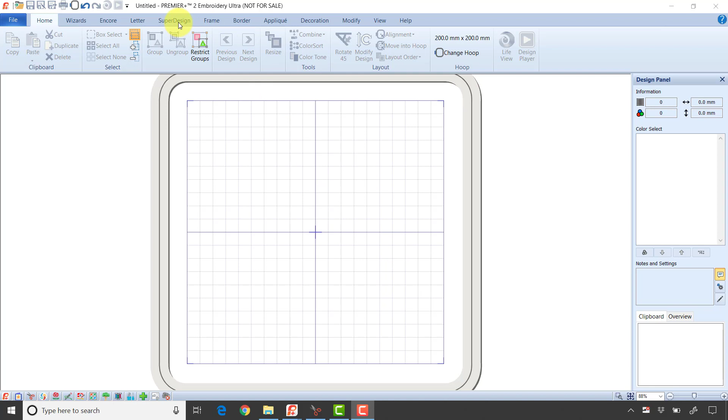The first thing I'm going to do is go over to the SuperDesign tab, change my category to flowers and leaves, and grab this second little red flower. The nice thing about the super designs is you can specify how large you want them to be. I'm going to bring this in at a height of 25 millimeters by setting the size to 25 and clicking the green check mark to apply. So I have that little red flower now.

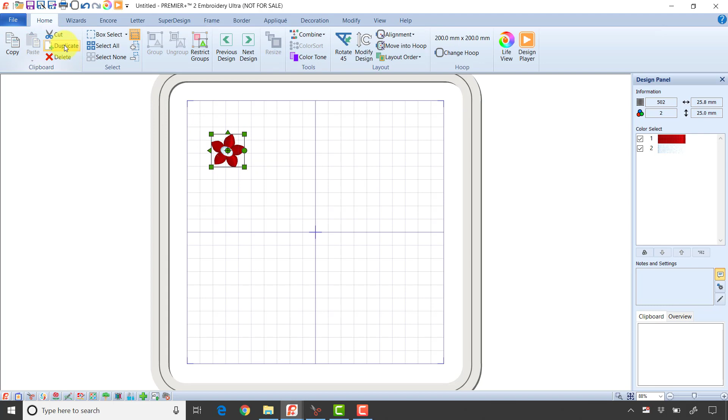I'm going to go to the Home tab, and I want a second flower, so I'm going to duplicate it. On this one, I'll go to my color list because I want this flower to be a different color so we can see the difference when we start encoring. Let's double click and make it a nice light purple. Well, that looks like dark orchid. That'll be good.

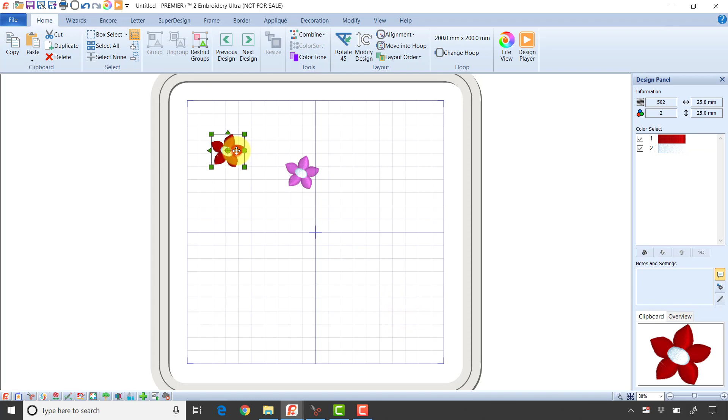So now I have two different designs. The first one I brought in was the red flower, and the second one, the one I duplicated, is this light purple one. Now let's go over to the Encore tab and talk a little about the Encore settings. I'm going to start by just encoring a single design, then we'll look at both of them.

So if I'm encoring this flower, first of all I'm going to start with the shape, a circle. When I encore to a circle, I have a design selected, and I tell it how many repeats I want. So if I want this to have 8 repeats, I just run the number of repeats up to 8 and click preview, and it puts 8 of them in a circle.

Now I can grab any of these designs and pull them in or out and adjust how they fall in relationship to one another. When I've created the design that I like, I just come over and click the Apply button, the green check mark, and that will create the design.

Notice up here under Arrangement, they're checked to be grouped. So they came in as one group, and I can tell they're grouped because I have these orange handles in the corners. The orange handles tell me I have multiple objects here, in this case 8 flowers, and they're separate objects still, but they're grouped together so I can move them or treat them as one.

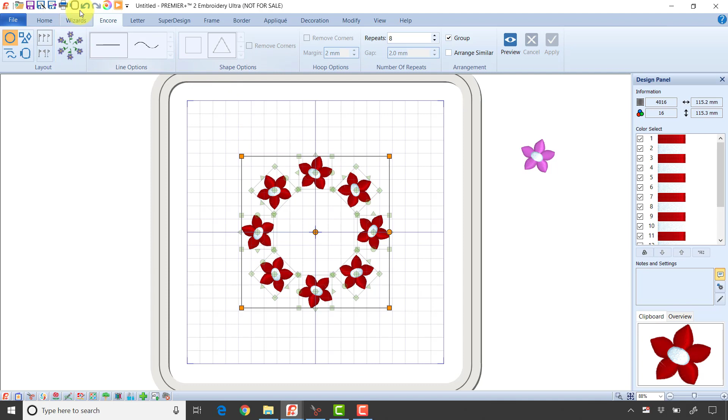I'm going to hit undo now, so I just have the single flower. Then on my keyboard, I'm going to hold down the Control key and press A. Control A is select all. I could also go over to the Home tab and click select all, but Control A is an easy way to select everything that's in my work area.

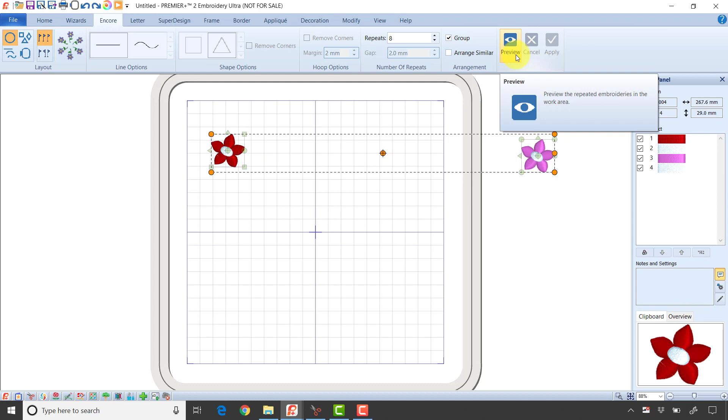Now if I come in and encore these 2 flowers, it will alternate every other flower. So I start with my first flower at 12 o'clock, and then it spaces out the rest of them evenly, alternating between number 1, number 2, number 1, number 2, and so on.

Let's cancel that. The next one I want to look at is encoring to a line. So if I encore a single design to a line, it will just space out copies of that design. Now remember, we also have the option to mirror. Right now I'm on standard, so all of the flowers are facing the same direction. If I go to mirror, then every other flower will be flipped. So if I click preview again, now you can notice that every other flower is mirrored.

Now one of the things I like about working with Encore is if you don't like the setting or you want to change it, you don't always have to cancel out. I can make a selection, click preview, and then come over here and change my options to look at it a different way. I am going to go ahead and click cancel now.

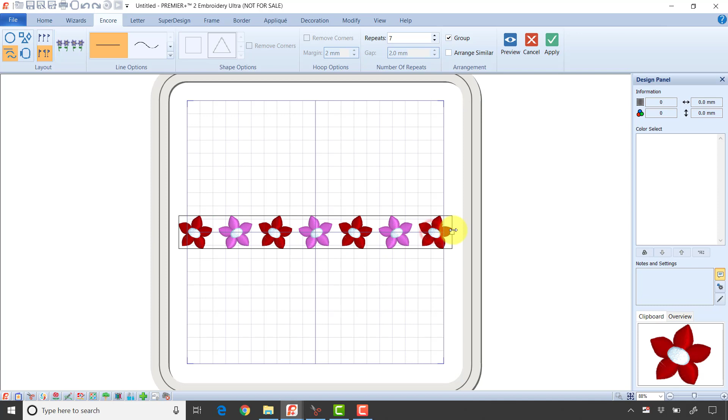Now I'm going to do my Control A again to select both flowers, and this time let's go to, say, 7 repeats. When I click preview, now I have design number 1, design number 2, design number 1, design number 2. I have a handle over on the right side, and if I click and drag, I can space those out evenly. If I don't want them to be mirrored, I can come back and change it to standard, click preview again, and it will redisplay that encore, now with all the flowers facing the same direction.

And again, I can space them out or adjust how they fall either closer or further apart. This is a great way if you're working with buttonholes in the hoop to get even buttonholes spread out for the back of a pillow or a garment. Let's go ahead and click cancel.

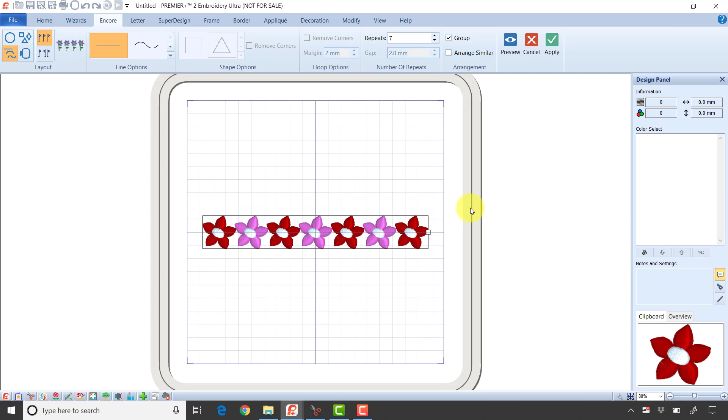I'm going to grab this flower again, and now let's look at the option to Encore to a shape. I think the triangle will make this easy to see. So I have a single flower selected, and I'm going to go to Standard so they're all facing the same direction, and do a triangle.

There's a setting here under number of repeats for gap, which is how much space will be between each flower. If I click Preview, it's created a triangle, and the gap adjusts the minimum amount of space that will show up, using the number of designs it needs to space out evenly. If I make this larger or smaller, it will continue adding or removing flowers until it creates the shape. If I adjust the gap to 5 millimeters and click Preview again, now there's a minimum of 5 millimeters between each design.

I have a handle on the top where I can adjust the height, and a handle on the right side where I can adjust the width. If I hold down the Control key on my keyboard, it will adjust the height and width at the same time, adding or removing flowers as needed to build this shape.

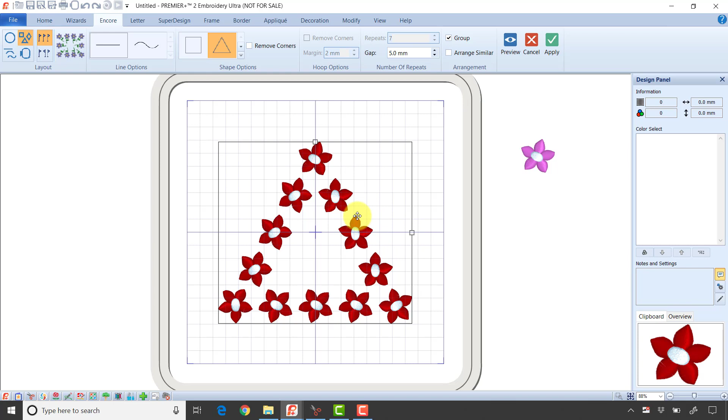Now let's click Cancel. I'm going to click Control A so I have both of my flowers selected. Remember, flower number 1 is red, and flower number 2, the second one I brought in, is pink. If I had more than 2, it would just continue alternating between them.

Now let's take the gap down, I'll leave it at 5, and click Preview. What you'll see is the first design I brought in, the red flower, will be at the corners of my shape, and then it will use the second design between each of the corners.

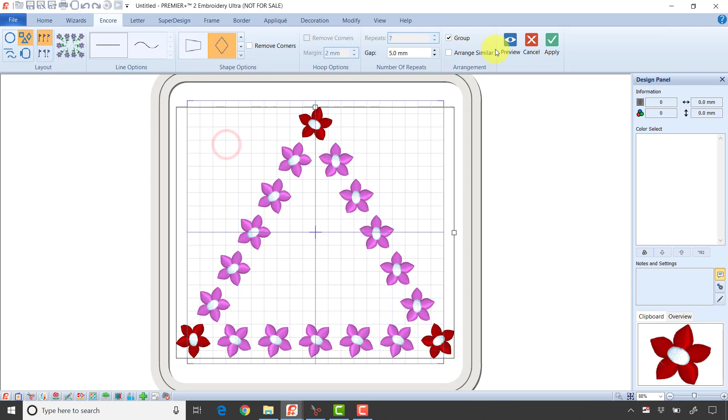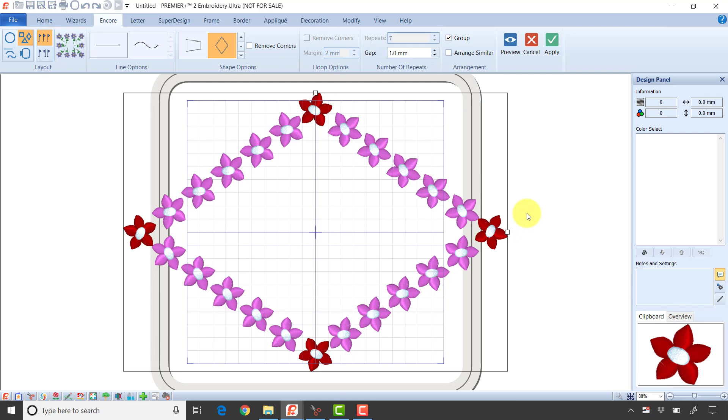If I go to a different shape, say this diamond, when I click Preview, because the diamond has 4 corners, I'll have 4 of the red flowers and then 2 repeats of each one. If I take the gap down to 1 millimeter and click Preview, now it has room for 3 flowers between each one of the repeats. And of course you can also adjust that shape using the handles on the top or right side.

The last one I want to look at is Encore to the hoop. When I Encore to the hoop, I have a couple of different options. I can tell it the margin, which is how far away from the edge of the hoop. Let's set the margin to 5 millimeters, and the gap is the minimum space between each design. I'll set that to 5 millimeters as well.

And click Preview, and you'll notice this design is about 5 millimeters in from the edge. I have designs in the corners, and then it's using the gap to determine how many flowers will be in that space. If I go to a larger gap, it will make sure there's more space between each one of those flowers.

Let's click Cancel. I'm going to click Control A one final time so both flowers are selected. Now when I click Preview, my first design goes into my corners, and the second design spaces out evenly between each corner to create a border all the way around the hoop. This will size to whatever hoop I have selected.

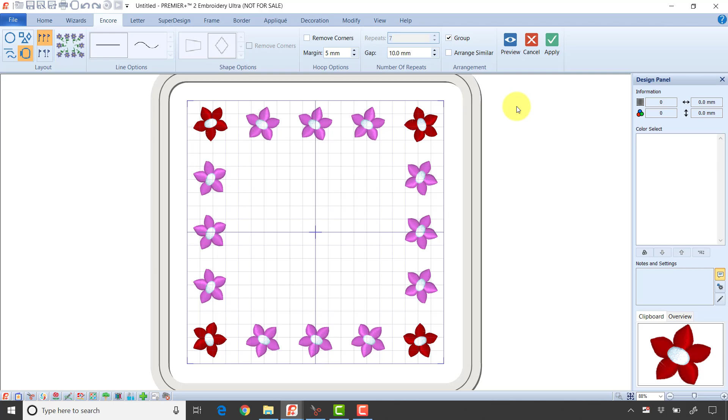So if I click Cancel, I'm going to click Control H on my keyboard, which is a quick way to bring up your hoop dialog box. Let's try the width here instead of 200, at 260, and click OK.

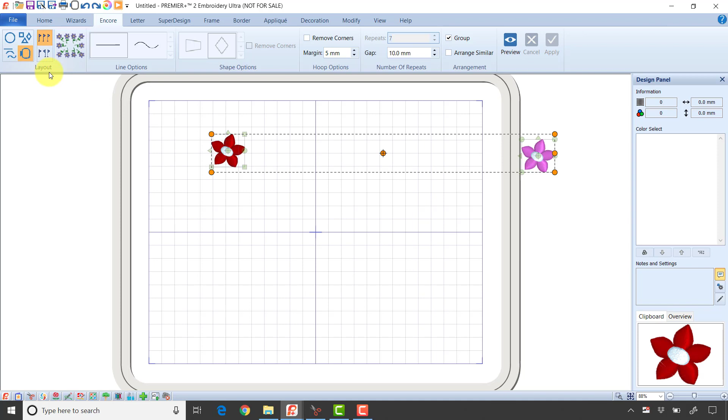So now, with my hoop selected, I'm going to go to Encore, Layout to the Hoop, and click Preview. I end up again with the designs in the corner, and this time it had to space out 5 flowers across the top because my hoop is wider than it is tall, and it only needed 3 on the sides. Again, if I change this gap to say 2, it will have space for more flowers in the repeat to make that custom border.

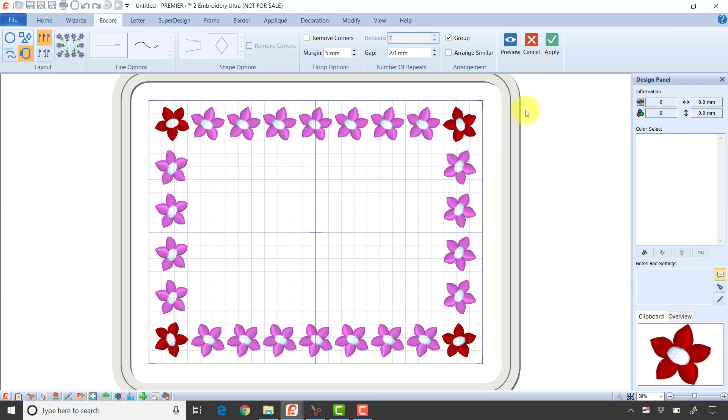I think Encore is just one of the coolest features in our software, so I hope you've learned a little something more about it today. Thank you very much.